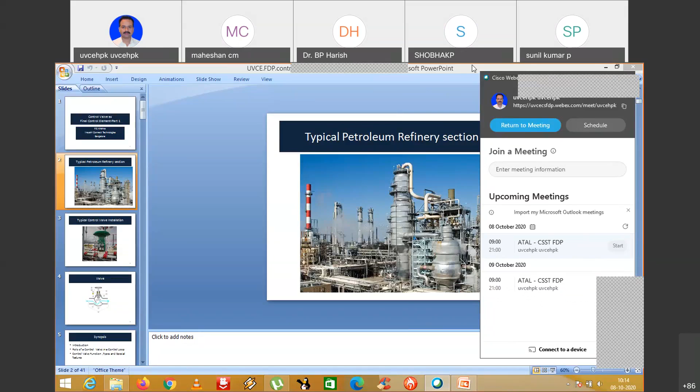He has to unmute himself. Sir, one second. Yeah, screen is... Yes, Maheshan? Yes, it is visible, but sir is in mute. Sir has muted himself. Okay, no problem. Unmute, please sir. No, not unmute, unmute yourself sir. I'll send the request, you can click on that. I have sent the request. Sir can say okay.

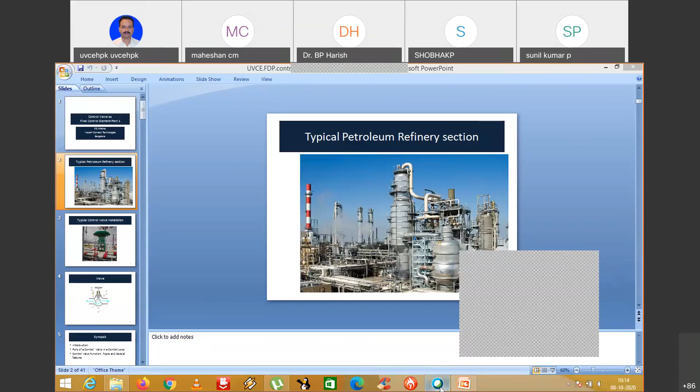So I'll wait a second. I'll come out from the slide share. Sorry, you'll correct that one. Sorry for this one, okay.

Hello? Hello? Can you hear me now? Yes sir, now you can hear. Now can I press share the screen? Yeah, you can do now, sir. Okay, I'm now doing, I press the screen, share screen. But, and then can I share the screen also? Yeah sir, you can share now. Now it's coming? Coming now. Yeah, I press the share the screen again, I press.

Screen not coming, sir. Not coming. Now it's coming there. Sir, not coming. Is it coming or not coming? Coming sir, coming, you can continue. Okay, sorry, my apologies for all this disturbance, you know. No problem, sir. Can I continue now at last? Yes sir, okay.

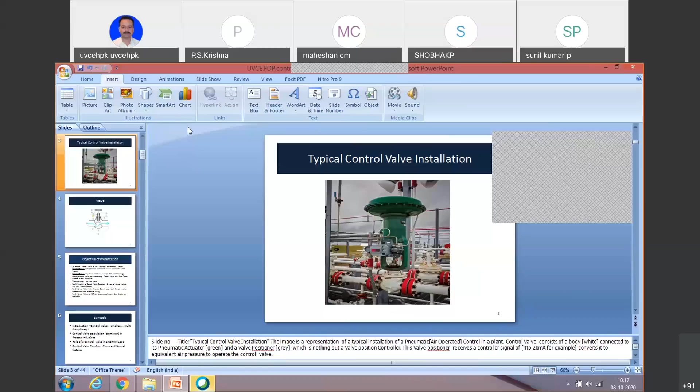Did you see the next slide, which is called valve? Is the next slide clear to you? Hello? Sir, yes sir, clear. You can go ahead, okay.

Now I start the presentation. The objective of the presentation is to present the control valve in the industrial environment so that the teaching faculty can appreciate application issues and demands of the process. Your academics already are teaching control valves in some form or the other, and this discussion would help to further enhance their knowledge. The teaching faculty may like to introduce excerpts from this knowledge sharing exercise while they're covering control valve as a final control element. The three parts of this presentation - the first part, which you are going to see now.

I find some echo coming. Is it because of me or is it because of something on that side?

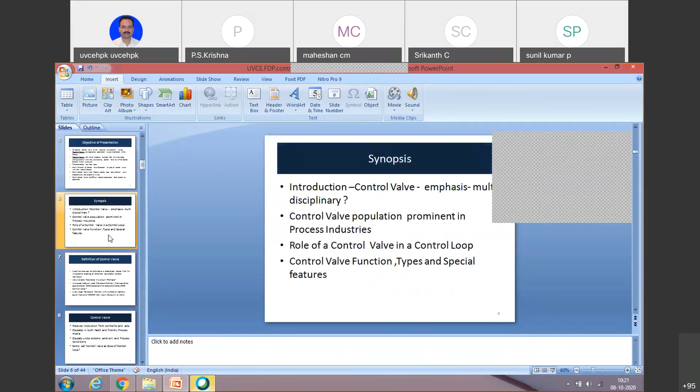I will take you back to that slide for a minute, which is going to be the governing slide. You may be surprised.

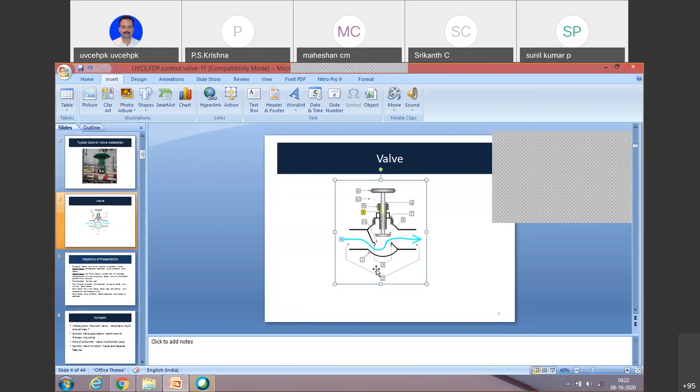This multiplied by n times becomes your control valve. So we are going to talk about that. And before we talk about that, we are going to say the control valve in the laboratory is what everyone has seen in the case of academics.

All of you are familiar with control valves because you do a number of experiments. I've seen it in 1, 2, 3 colleges in Bangalore that have a very good lab with the control valve. It's not that you are not familiar, but it is very important to know how it really functions and what are the problems when we go out of this lab or academic environment.

Now, it's like learning driving, and in the initial days, you are only practicing on a quiet road, and on this quiet road, you master the vehicle driving. Later on, when you go to a busy road, like those who are in Bangalore would know the traffic pattern on the Hebbal side flyover, you would know the kind of maneuvering you have to do, and the kind of distractions and all the kinds of attacks on the car in terms of speed, closeness, etc.

Now, this scenario is similar to what a control valve actually sees when you go to an industrial mode. Repeating, the control valve in the lab mode works and everyone understands its function. There is no amount of disturbance there; everyone works on it and understands it. But that is not the aspect we are going to talk about now.

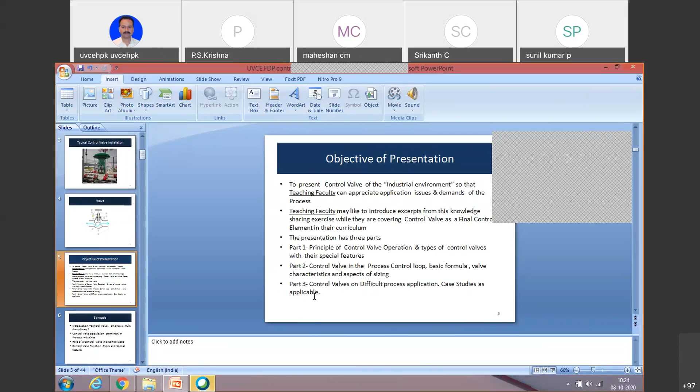So what we say is a control valve can be defined. Now, since you've seen that small valve, if you put your mind onto it, a control valve has been defined as a mechanical device that fits in a pipeline, creating an externally adjustable variable restriction.

So forget the laboratory, and take this control valve device and put it in an industrial complex where it is actually installed in a pipeline, functioning exactly like a variable resistance. In the variable resistance, you operate that knob and move the resistance so that the current changes. In your small tap, you're moving the handle and adjusting the amount of water that goes to the sink. The same thing on a larger scale is what a valve does in industry.

If you look at the small valve I showed you, that is a mechanical valve. You have similar valves in industry which can go up to very large sizes. For example, globe valve sizes, control valve, globe valve, which you're going to see, I have seen sizes up to 14-inch pipeline. On other valves, you can get higher and higher diameters. So ultimately, it's doing the job of being a variable resistance in a circuit.

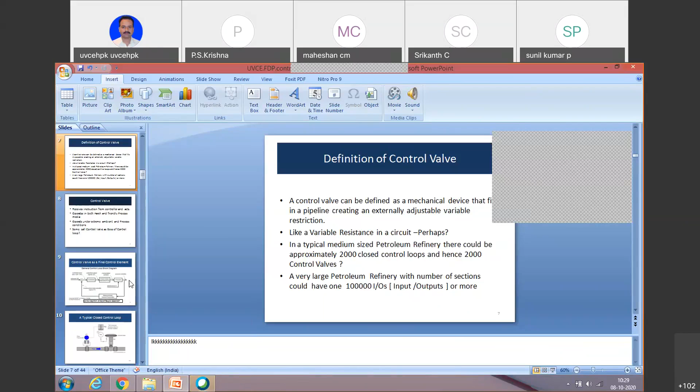This is something familiar to all of you, so I won't talk much since I'm only taking a small portion. I would like to acknowledge the lecture given by Dr. Prakash on the PID controller, which was the background, followed by Dr. Anuj Abraham who dwelt on the various types of PID controls available. They both explained beautifully, and I thank them because today I will not touch on that subject as I don't think I can add value.

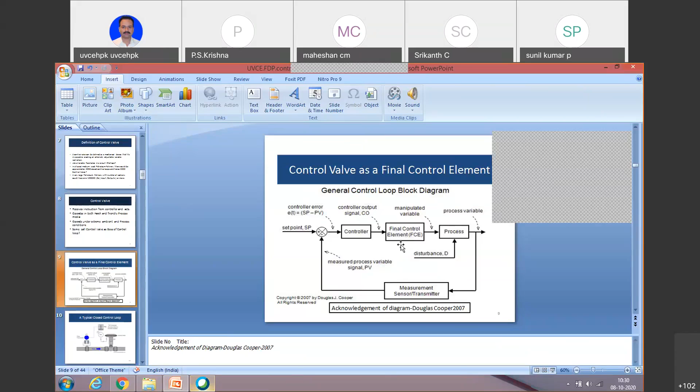So I'm now going into this final control element, called the control valve. To be frank, during control theories, this valve is not given the importance it should get, because it's not relevant when talking about Nyquist criterion, stability, Bode plot, Laplace transforms and the associated mathematics. But by the end of the discussion, I can suggest a few topics for which you can build models for control associated problems.

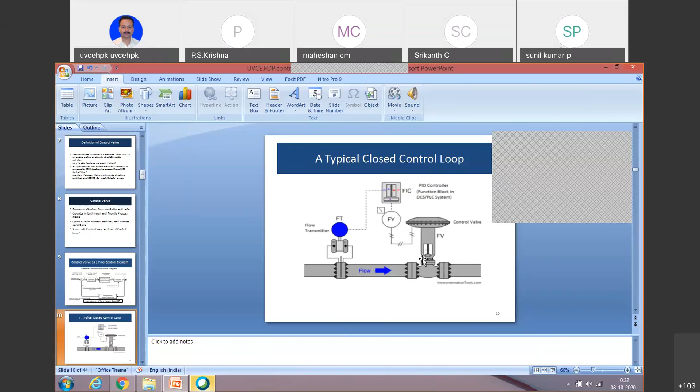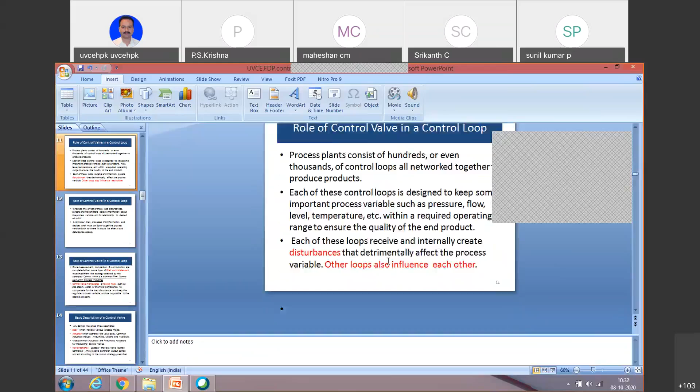If you see that small example of the valve I showed you, we are slowly developing that valve to look like a control valve, and you'll see how in the upcoming slides. This is nothing new, and I may even skip this slide, but basically it tells you the control valve receives inputs from the controller. I'll go through it anyway since we have time.

Process plants consist of hundreds or even thousands of control loops, all networked together to produce end products. Each of these control loops is designed to keep important process variables such as pressure, flow, and temperature within the required operating range to ensure the quality of the end product.

Now, the next thing is important. All this is known at the laboratory level, but now I'm going to slowly take you out of the laboratory and into the industrial arena. Each of these loops receives and internally creates disturbances that detrimentally affect the process variable, and other loops can influence each other. In the lab, you have one pipeline, one process, and a storage tank of water, where you do simulation or control.

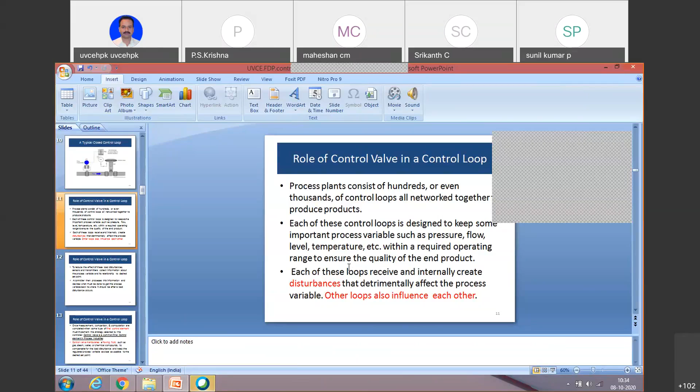But if you look at a refinery or any other chemical plant, you'll find valves scattered, each with its own loop. They clash—the operation of one valve disturbs another unless you modify the PID algorithm. A control valve in the industrial arena is a different ball game, and that's what I am going to talk about today. At every stage, I'll point out the differences and the problems.

Now we move to this: once measurement, comparison, and computation are completed, some type of final control element must implement the strategies selected by the controller. The control valve is a common final control element in process industries.

Ladies and gentlemen, can I tell you one thing? If I say the control valve is the only final control element, that would be wrong—it's not true. A final control element, as you all know, can also be a variable frequency drive.

Nowadays, what they do is alter the speed of a pump or a fan, which saves much more energy than putting in a control valve and operating a damper. So I am to some extent biased, and I'm only leading you to control valves because that's the topic of today's discussion.

Please remember, if I say the final control element is only the control valve, that is totally wrong. Dr. Anuj Abraham was showing such interesting things which are all receiving PID outputs, and none of them even have a single valve. There are other devices acting as final control elements, and in that complex example, he explained it so well.

A control valve manipulates a flowing fluid. When you say fluid, many people think it's only liquid. No, fluid is gas, steam, water, or chemical compounds, used to compensate for the load disturbance and keep the regulated process variable as close as possible to setpoint.

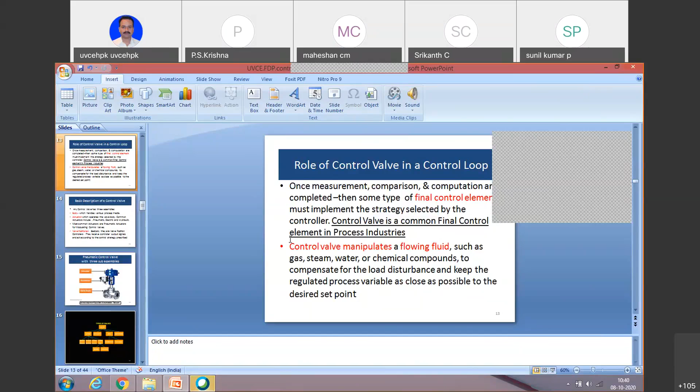But in this case, you can imagine the kind of liquids being carried - sulfuric acid, nitric acid, naphtha, liquefied petroleum gas, you name it, everything. And if they leak, you can get into a different situation which I'll explain tomorrow when I do safety instrumentation. Now I've talked to you about the agony of the control valve. We'll go to the next slide and get a little more organized.

So I told you that the media is not that straightforward. I will explain to you only the hydrodynamics. What about the temperature? What about the pressure? What about the corrosion activity? All these questions you are asking, I'm not answering, because I'm going to answer it at the third slide, part number 3. So that means the process media is not straightforward.

So the controller has to work with all the constraints and produce the results, which means where are the results? It's in the control room. When you go to the screen and see the control beautifully working, the algorithms make sure the set point and the measurement point both coincide. So it's easily said, but what agonies go through in the industrial atmosphere is what I'm emphasizing.

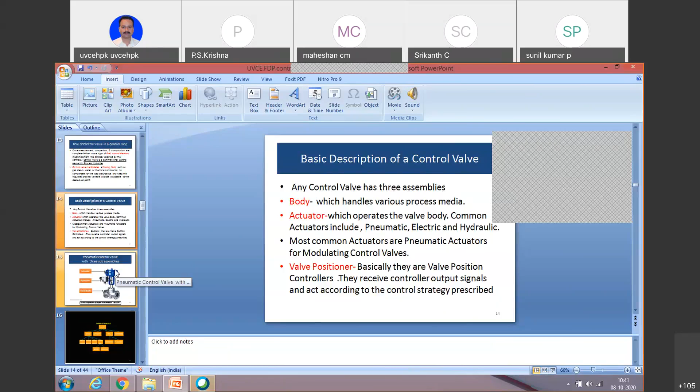Any control valve has got three elements, three assemblies. One is called the actuator, the other one is called a positioner, and the other one is the valve body.

You saw in that slide, I don't think I have to take it again. There was a stem which was moving down because you were turning the handle, and that was having a screw. So that was here. The same spindle is going to move up and down, so it's called a sliding valve. And the sliding valve moves up and down—how does it move up and down?

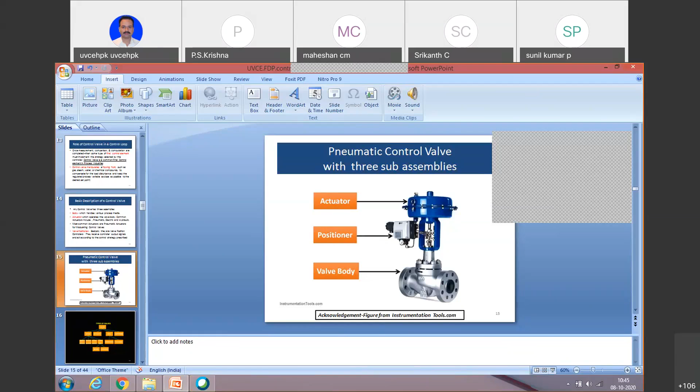Professor Prasanna, is my audio audible and clear? Yes, audible and clear. I'm going a little fast—I think I'm losing time since I haven't finished the first slide, so I'll speed up a bit.

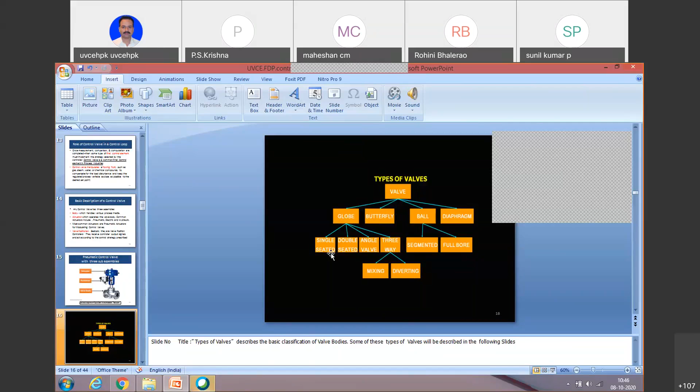You have other coordinate elements as well, such as single-seated, double-seated valves, etc. Now let me explain this to you.

The actuator has a spring. You give air pressure, the spring opposes it, giving an up and down movement. This valve stem position is picked up by the valve positioner, and the liquid flows in and out like this. What is the triangle for?

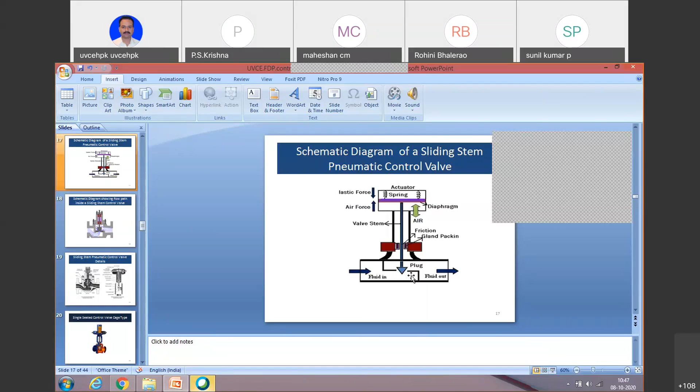The triangle is the shaped port, a shaped plug. The plug is shaped in various ways to give a certain characteristic, which you'll see as we go on. This is the basic picture of how a control valve looks.

If you ask me what item I want to emphasize, I'd say the much-neglected item is this brown and magenta colored thing. This is the gland packing. Now what is this gland packing?

If this gland packing was not there, the liquid would leak into the atmosphere. So there's a packing called gland packing, which varies based on the process media material, and it moves up and down—not only to seal, but also to quietly lubricate. This is a very important point called the gland of a valve.

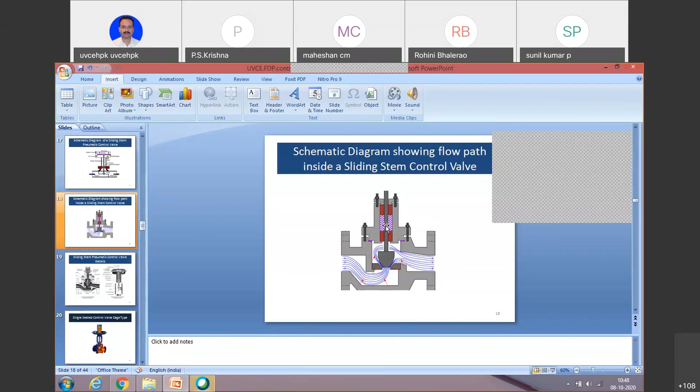I'm not going to spend much time on this. This is your body and this is your actuator. Both of them have to be connected.

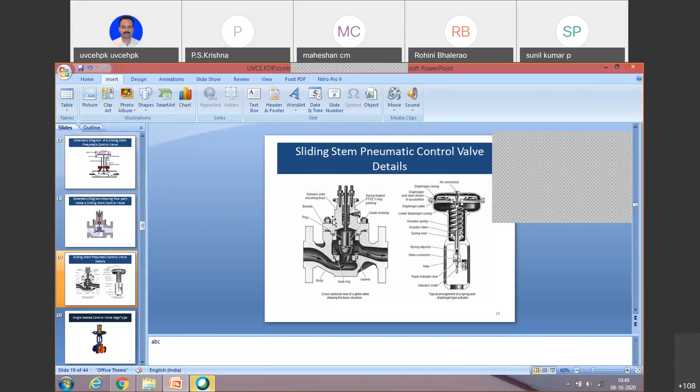Professor, will all these people get copies of the slides? Yes, sir. They'll have a lot of reading to do since I won't be able to go through and explain everything.

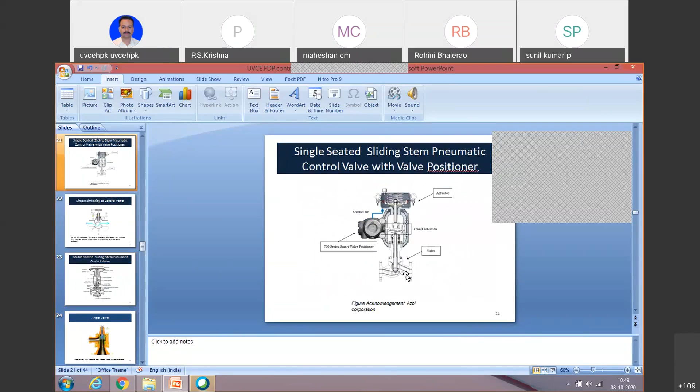This is how a single-seated valve looks—I can see the spring also. This is a complete valve showing the positioner and diaphragm, etc. Nothing very different from what I talked about.

The question is why I'm showing this—this valve looks a little different. This is globe type. There are basically three types of valves: globe, rotary, and diaphragm type. Let's not worry about the diaphragm type. So you basically have globe type, with the sliding stem going up and down, and the other is rotary.

This has a double seat. The very important point I want to emphasize is why a double seat? A double seat ensures two things: it allows a little more flow because the flowing port becomes two, one side and the other. And for the same size, the actuator needed is smaller.

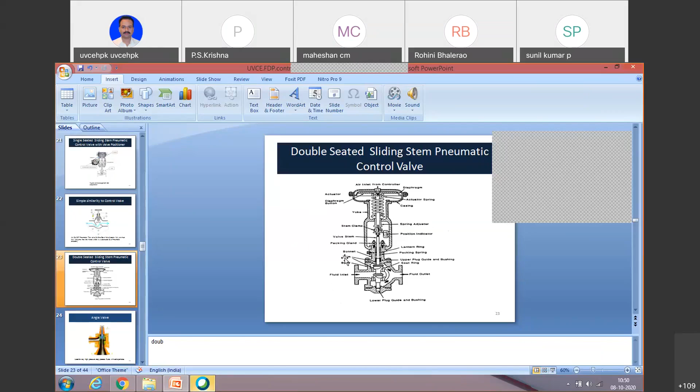You might ask, so what if the actuator is small? Because you save money. But everything isn't all that clear—by introducing a double-seated valve with a smaller actuator, the job is done, but it will leak in the shut position. That leak you don't mind; when shut, some liquid will pass through, which doesn't bother you, and process engineers also agree. So that's a disadvantage, but the advantage is the actuator size becomes small. This is another type of valve.

It is called an angle valve. Liquid in, liquid out, and is used for liquids with solid particles.

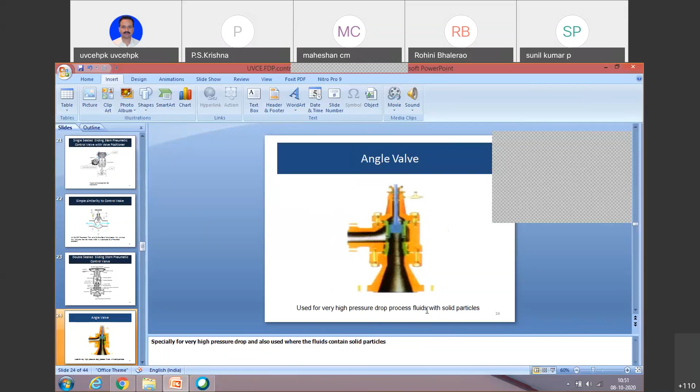The globe valve, which you saw now, can go up to about 14 inches. With my experience, I've seen that 14 inch itself becomes huge. A 14-inch valve will stand at least 8 feet in height, everything put together, 7 to 8 feet.

And in the refining section, the largest I've seen is 9 feet, 9 feet piping with a control valve, a butterfly valve.

Now I'm going on to a very relevant subject. The moment you say 9 feet and it's a huge valve, what kind of actuator do you use? I've been only talking to you about pneumatic actuators. Someone is asking me, is there any other actuator? Yes, there are electrical actuators.

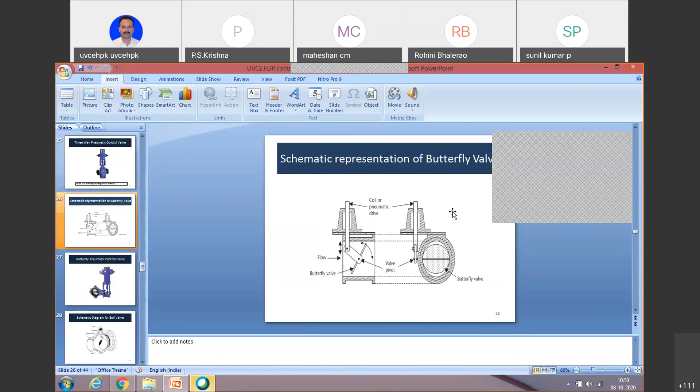This is a valve which belongs to the rotary actuators, and you can see this hole will become turned the other way, it will become shut. This is how a ball valve actually looks.

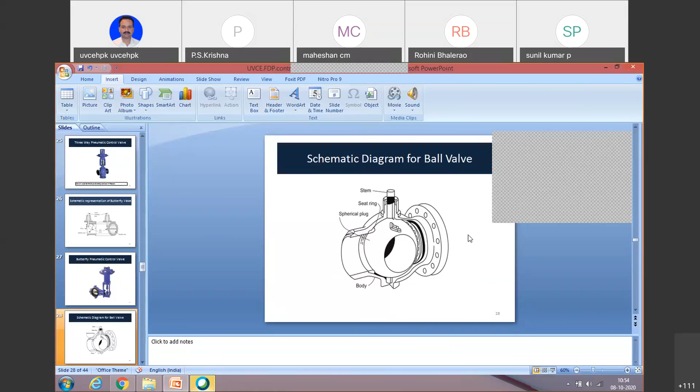You know about the actuator, positioner, etc.

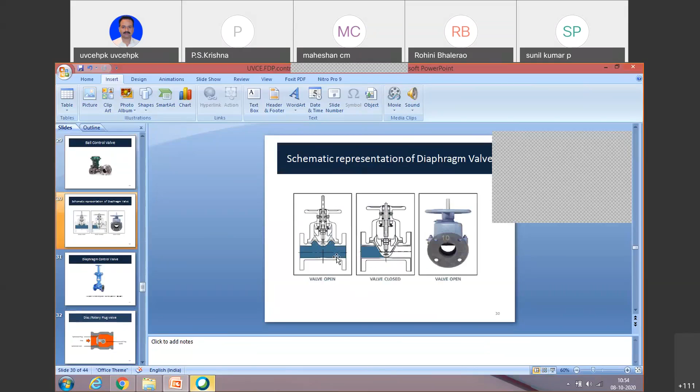This diaphragm valve is used more in the water treatment plant, where the diaphragm itself gets pressed. You see this blue portion, this is shut, open, and then they press it down and shut it. That's the diaphragm valve. We use it in pharmaceuticals also.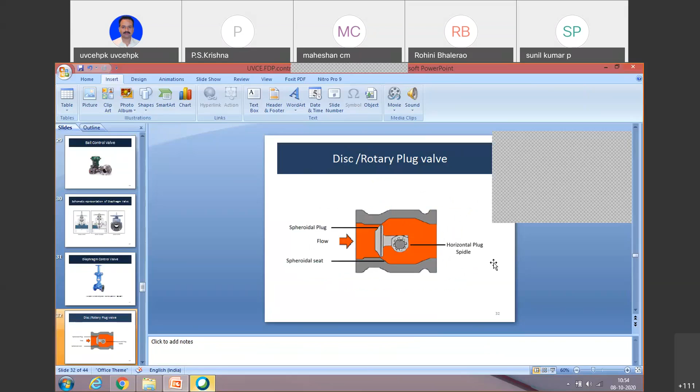This is another rotary valve, going like this. Another variation, this is also a rotary valve. And all of them have advantages which are spelled out in this literature. Please go through it, but I don't want to read it. When you use it and why you use it is all written there.

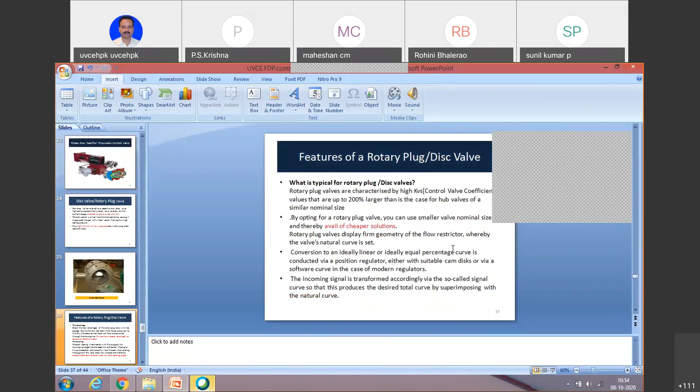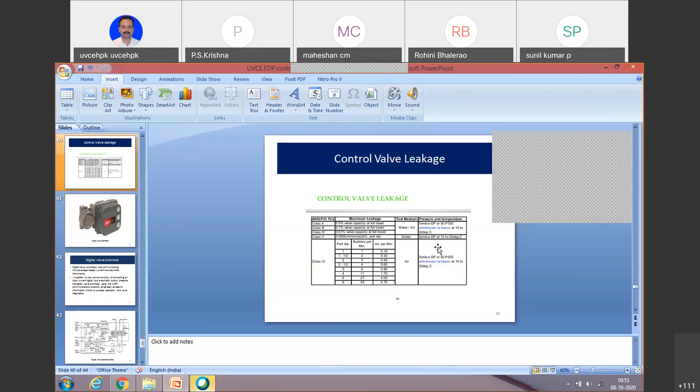You see, when I was working, the normal discussion and fights take place because the valve is leaking in the shut position. So in this international standard table, it tells you what is the leak rate that is permitted for each type of class of leakage.

So this is a very interesting table. So a valve will leak, but if it has to be tight shut off, then the manufacturing inputs have to be totally different.

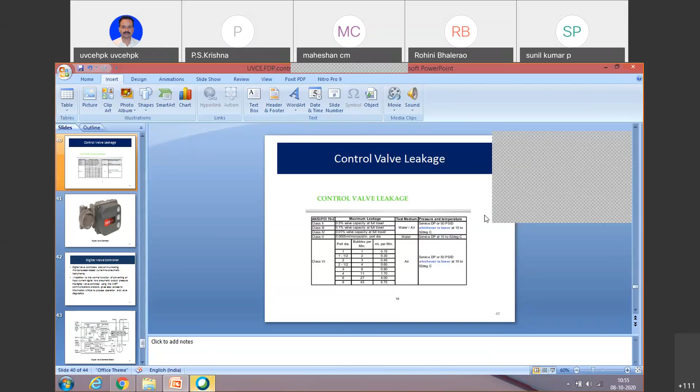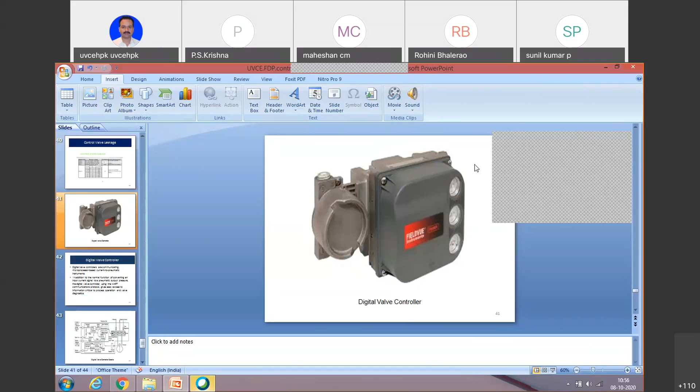It's able to give you diagnostics which go to a central receiving PC or to some other device like an HMI, where you can get the code and see that the valve is moving slowly. The valve position is more for this load, and it gives you all the temperatures, etc. All the diagnostics messages are given by this digital valve controller.

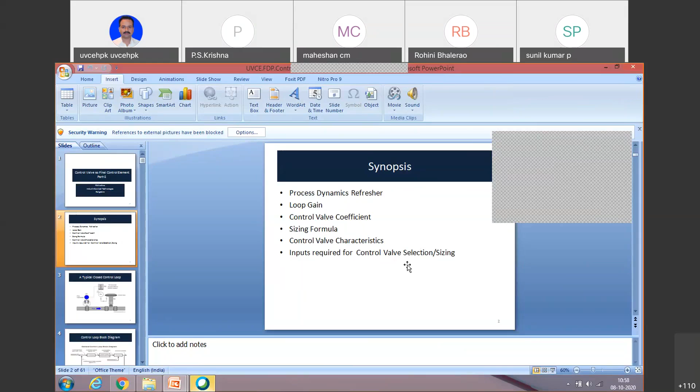So many years back, the well-known company called Masoneilan in the US devised a simple method which became an international standard. They said let us generate a new expression called control valve coefficient, called capital C and small v, control valve coefficient. It is explained in a very simple way.

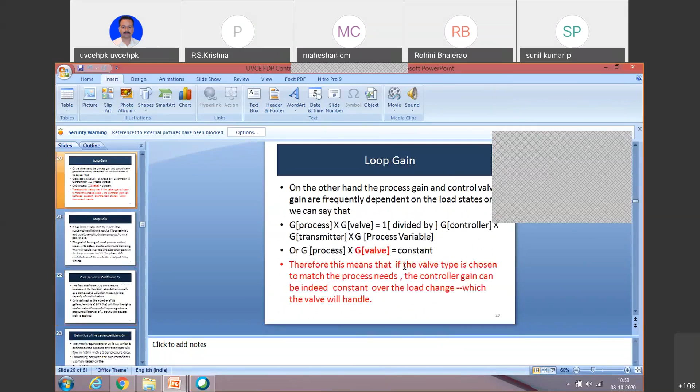I don't have a diagram, but you can imagine it without much problem. It's like this: you take a huge tank of water and fill it up so that the height is maintained because of overflow. You allow water to flow in and the tank will overflow, but the height remains the same. What is the height? The height is 1 pound per square inch of water, and that height will be maintained all the time.

The height corresponds to 1 pound per square inch. You have to make sure the water is at 60 degrees Fahrenheit, because you've got a laboratory, you can do all that. You get an accurate flow measuring device, very accurate. Then you put the valve you've manufactured there, keep the valve open, measure the flow, and the amount of water in US gallons per minute that flows across the valve, seeing a pressure drop of 1 psi, can be called the CV, control valve coefficient.

KV is nothing else, it's done in the other unit, meter cube per hour and bar and all that. So remember CV: 1 pound per square inch water height, and at the receiving end, whatever flow you've collected in gallons per minute, that becomes the CV. So you've got the CV.

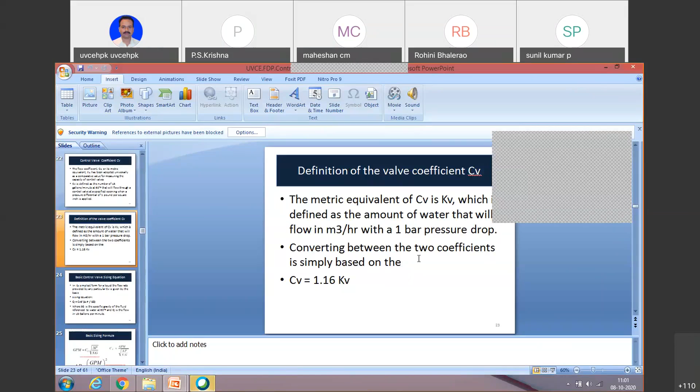So you've got some common currency, you could say. In the control valve world, you've got a common currency. Now why do you require it? Because you are the process engineer or instrument engineer, whoever it is, you are going to select a valve for your plant. Selecting the valve, it all has to go through this formula: Q equals CV,

that's the control valve coefficient I'm buying from Emerson, times the square root of delta P divided by SG. Let us for the time being assume that we are using only water, so that it will get rid of this SG.

So basically it's square root of delta P. Now what is delta P? It is P1 minus P2. What was the delta P in the laboratory testing CV? It is 1 psi. So when the plant engineer requests you to procure, he will give you all the data, and his delta P may be 300 psig. We don't know. So he'll give you the size, everything, and so you'll arrive at this CV.

You got Q because the plant manager has told you to do that. He has given you delta P, and said the line size is so much, please select a valve. So you got Q, you got delta P, you do not have CV, and you got SG also, specific gravity output. So what you do is you calculate your CV, and then you float an inquiry or a specification. You send the specification to Bailey, Siemens, Instrumentation, Palghat. Now all three will quote. They'll say for this particular process data, I'll give you a valve, CV 50, the other man is saying 52, the other man is saying 55. So then it's your game you have to play.

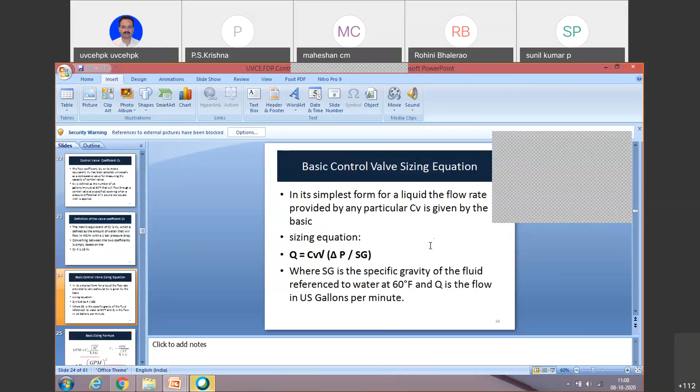This one I will explain to you in a very simple way. Everything has got a gain, right? I won't spend too much time. Process, valve, transmitter, everything has got a gain. Process, controller, transmitter, process itself has got a gain.

If you get a figure, if you keep the figure below, finally if you get the figure below 1, then you have a reasonably sensitive controller which is not going to be unstable. But if it becomes more than 1, it's very, very sluggish.

So what happens is, this entire process, you do some tuning and bring the process to a reasonable shape. We are not going to talk about tuning because tuning will take at least twice the time, like 90 plus 90, 180 minutes. Even then, we won't do it fully.

So coming back to this one, let us assume transmitter is constant, your controller is constant because you have not altered anything. So the two players in this match are one is control valve and one is the process.

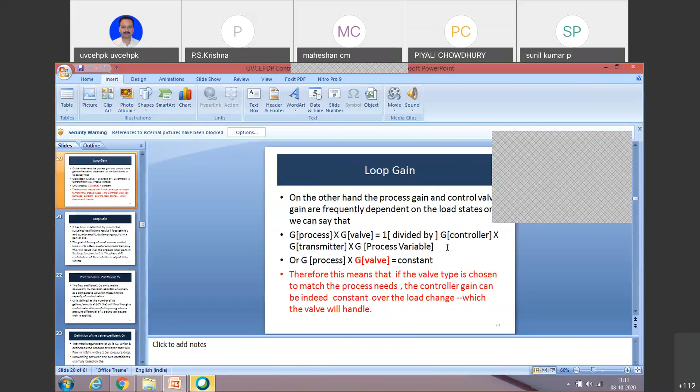Okay, so I told you two things. Delta P is only a pipe dream. Delta P is not constant, it's varying and it's creating hell for the process control. That will never change. So then we go on to another important subject, now this is a beautiful graph I want you to see.

I'll show it to you after a while. Now here, what I decided is I listened to all the stories and then I'm going to have 3 types of plug. You've seen that plug which I showed you for that profile plug. I said this is one kind of a profile, the plug which sits onto the seat. This goes up and down. This is another, the other contour, this is another contour.

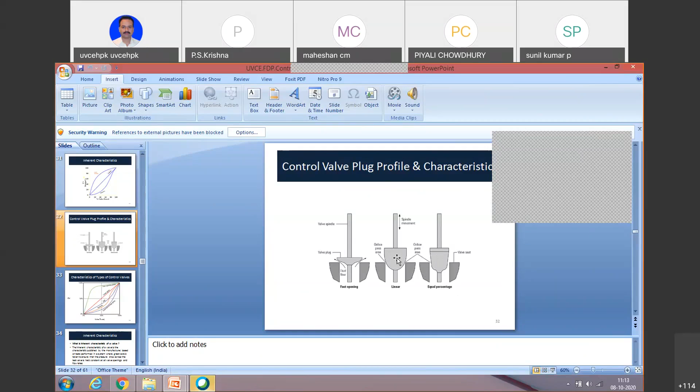Then what happens is, this is all designed on the base of your delta P. Oh, delta P is constant. So I will show my characteristic. So it's very cleverly done. So I have done this profile, I have done this profile also. So what actually happens in the real world is something totally different, which you're going to see now and get surprised also.

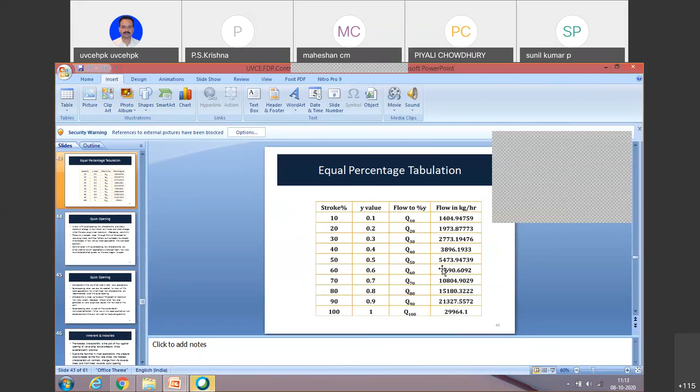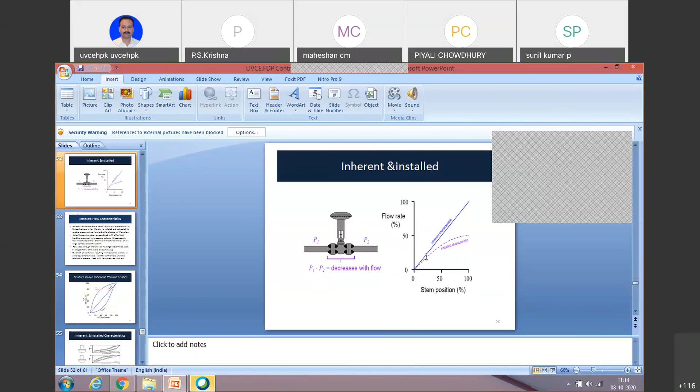Similarly, the equal percentage valve characteristic, what will happen is, I hope I got that to show you. Yeah, this is a miserable slide which you have to see to believe. See, what you wanted an equal percentage valve to do is slowly becoming linear.

And then the linear valve is becoming quick opening. So everything changes. So when I tell you that the control valve, we have to have all the respect, and not only respect, we have to have the sympathy, because when you do controller design only in your laboratory or when you do simulation, you take it for granted that the control valve is basically behaving itself. Actually today I have spent, it's really going to be 1 hour 30 minutes. I got another 10 minutes to explain to you in a nutshell that this is a pipe dream sitting in the laboratory. The reality is this.

And the reality is the delta P changing, summarizing the whole sheet, upsetting the gain. The linear characteristic is changing and becoming quick opening, equal percentage is changing and becoming linear.

What does the controller want? Controller wants, its dream is to get the output. I'm giving input of 5 milliamps, the output should be equivalent of that, the valve position should be equivalent of that. How it is done? They use an equal percentage valve because in that profile, it's slowly becoming linear.

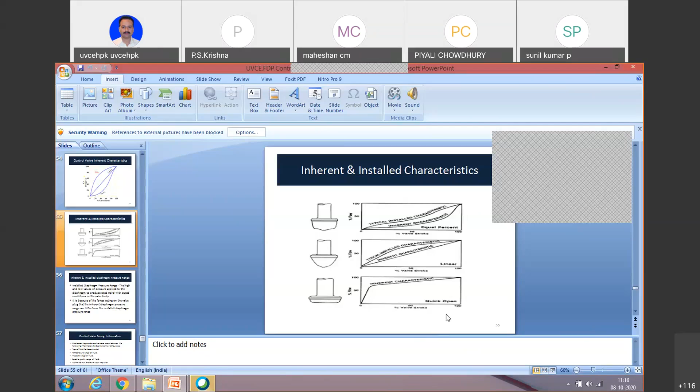So summarizing, you have to know that you're actually in a dream world in the laboratory, and what you see in the process, the main culprit is the swinging delta P. I've given you all the characteristics. There's one very important slide I'm going to show you.

The delta P, we say, I got a flow of 100%, so my delta P is like this. I got a flow of 50%, I'll get so much throughput. Pipe dream. The delta P reduces like anything and erratic. What are you getting? You're getting total haywire, everything goes haywire. Now to explain how P1 minus P2 changes, a beautiful slide. If you go through it, you will understand at least the myth about delta P. I think this is a very important slide for you.

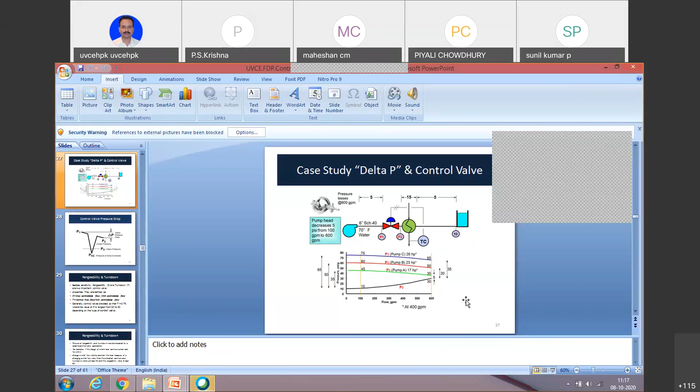Now, this one I'm going to cover - not bad, I'll be able to finish it.

This is the axis. This is your valve somewhere here, P1, and this is your P2. Just this slide will come again in another 5 minutes.

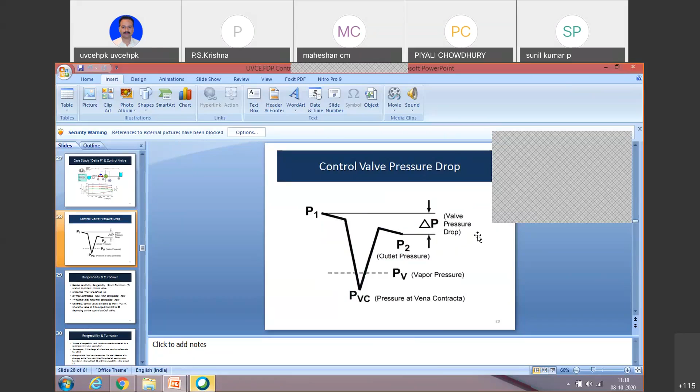No, these things I'm not covering. Please read this - it's very hard to cover now because I just don't have the time. I would have loved to have another hour, but it's not practical. So this is the one.

Now, a curve which is nicely shown. I'll take you back to that old simple valve which I showed you in the initial stage - what is that, is it shutting or opening?

Now it doesn't have any profile, it's got only a disc. That valve - the moment the signal is given, the seat is lifted, the plug is lifted from the seat, and water flows fully. That is called a fast opening valve.

That is used for emergency shutdown, which you are going to see tomorrow afternoon. I'll explain that valve to you at that time with some more inputs.

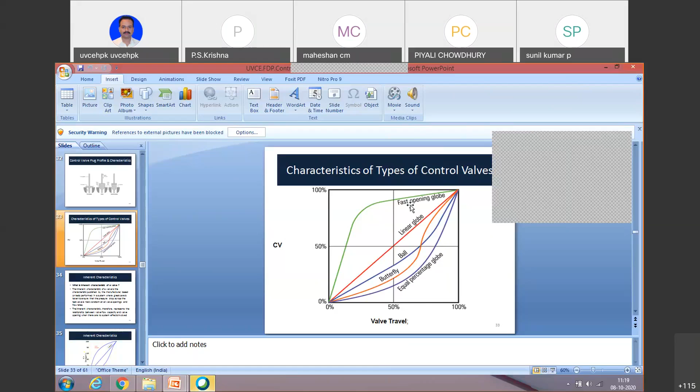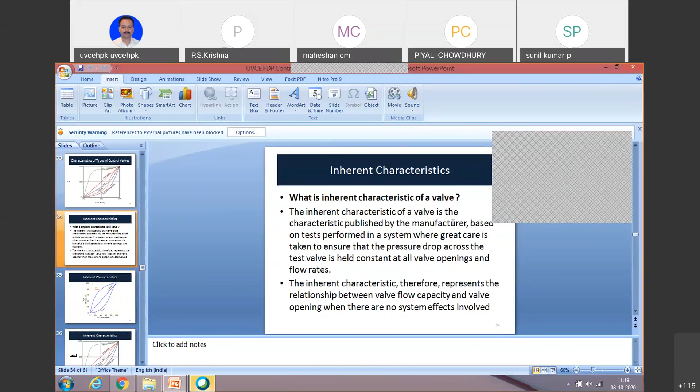So I have explained to you this very important statement: the inherent characteristic of a valve and the installed characteristic of a valve. The whole personality changes with installed versus inherent. Okay, now I'm through with this slide. I'm going to the last slide now.

Yeah, this is a very odd slide - I'd like to use the word odd, which I'm going to tell you very quickly. You have to read it.

Now we have come to - we were quite comfortable driving in the Hebbal flyover. Now imagine that you're driving in a crowded place in a hill station, where the roads are also uneven and narrow, trucks going by the side, and also the threat of wild animals and whatnot. So that is a difficult situation. So what is that equivalent difficult situation?

This is called high duty control valves, and the problems listed there are: flashing, erosion, cavitation, choked flow, noise, material of construction, and anti-cavity trims, etc.

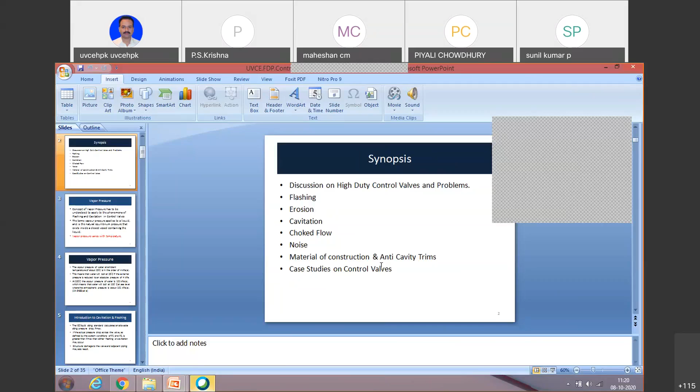Now I will lead you to that graph. I'm not going to explain vapor pressure - it's physical chemistry, it's written there also.

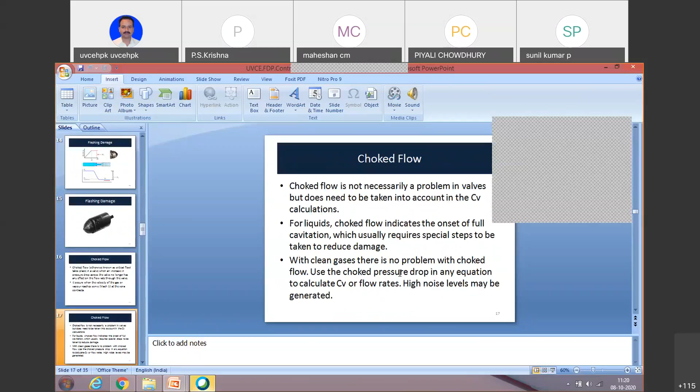I think I have to go back to that slide. Professor, if I take another 5 minutes, is it okay? Yes sir, yes sir - because I may have a little problem finishing.

See, the whole controller of my talk now is the vapor pressure. The vapor pressure above the liquid changes. When you boil water, the pressure is how much?

It's atmospheric pressure - at atmospheric pressure, the water boils and opens. So the pressure is around 14.7 psi, whatever. Now, with temperature, the vapor pressure goes up.

Now you see what happens - your control valve is somewhere in the middle. Is my slide clear to you, participants? Yes sir, yes sir, yes sir.

Very important point you have to note now - the pressure is dropping like this. Why? Because of the restriction of the control valve. Then what happens is I have marked P2, PV.

Now this PV is the enemy we are going to talk about - this is called the vapor pressure. And this is a shifting line, I'm deliberately shifting this line.

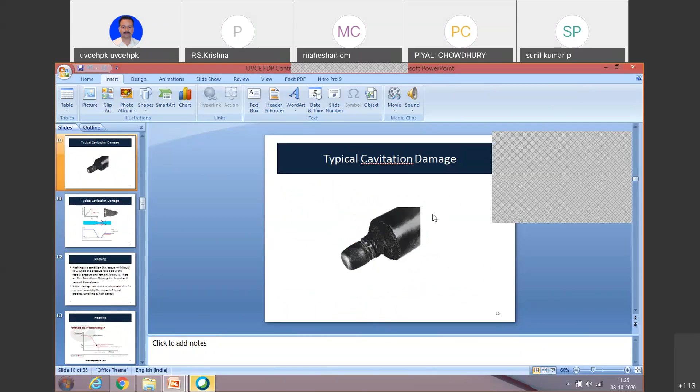I think there's one called flashing, which is also similar to that. This is the flashing cavity.

Now I'm going to take one more minute of the professor's time to explain my own experience, which will take about one minute only. Then I'll close.

I was commissioning a urea plant in December 1981—I remember the date—along with my Japanese friend from Toyo Engineering. What we were doing is we were trying to check the level control system from the control room, and the valve was seeing the process media, harsh process media.

We used water instead. We played a small trick—we said we cannot use the original material because no one will give you the original material to do a trial. So we used water, and we had the plug and stem made out of stainless steel, SS304. So stainless steel 304 was installed.

And then what is the upstream pressure? Now you all know P1 in my case was 3,000 pounds per square inch. And what was the downstream side? Let me repeat: upstream was 3,000, downstream was 300 psig, 300 pounds per square inch.

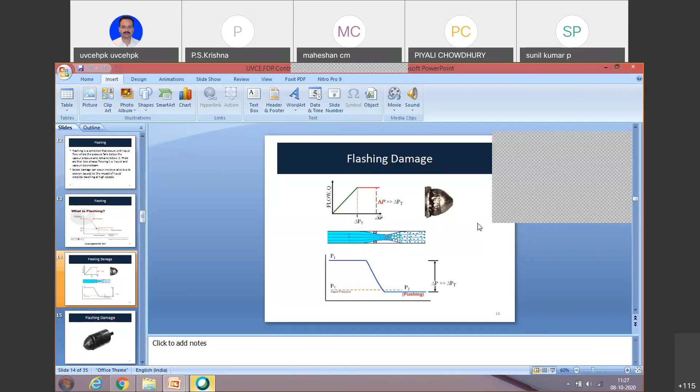You will be surprised that after only 40 minutes, we stopped the machine. We took the valve out for examination to see if there was any kind of damage inside, because particles, welding rods, can come in. What we saw was this: after 40 minutes of running, a beautiful stainless steel plug—this is exactly how it looked.

Now, perhaps it's cavitation, perhaps it is flashing. I cannot tell you the hydraulics of it, the reality.

Then, the next question is—before I end—we did a trial after that using the right kind of plug. This first one was a sacrificial goat; we wanted to sacrifice it because we couldn't risk the real one. Then we got a costly plug and seat, and we installed it, made out of titanium.

Okay, then I was also the engineer looking after that plant. After a 1 year shutdown, as per my list, I had to inspect the valve, the plug. When we removed it and saw it, it was as though it was new.

Now, my dear friends, that is the beauty of metallurgy. That's the beauty of knowledge of other disciplines. You have to have a multidisciplinary approach when it comes to control valves. It is no longer only the electronics, the mechanical, or the electrical aspect—it is also the process. Last but not least, you must know the process in and out. The world of the control engineer in a process plant is such that you have to carry multiple disciplines in your head.

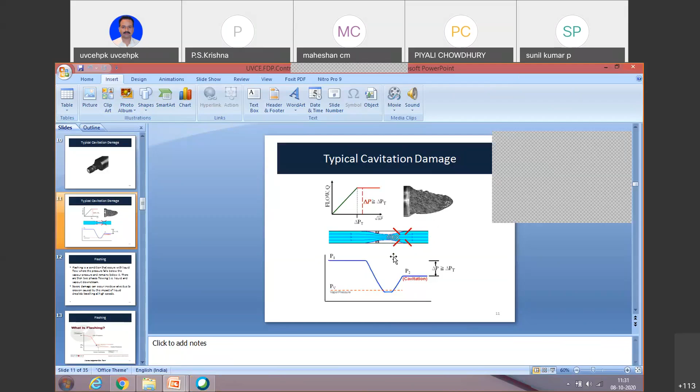That's the first method. Second method is, if you want to play safe and spend a little more money, the internals of these valves can be redesigned, and they are called anti-cavitation trims. That is, it will not be profiled like this, it will be profiled differently, let me show you.

Very nice question, sir. But the point is, if you have not taken care of the operating condition and are not aware of the red line, definitely you will have cavitation, and then you will face the music. So by anticipating the cavitation condition in your design itself, if you have any doubt, go for an anti-cavitation trim. Or the material of construction of the valve has to be hard-faced so it will not wear out, like stellite facing and other kinds of coating. Unfortunately, sir, I could not complete, I have so much more to say, but I had to stick to the time.